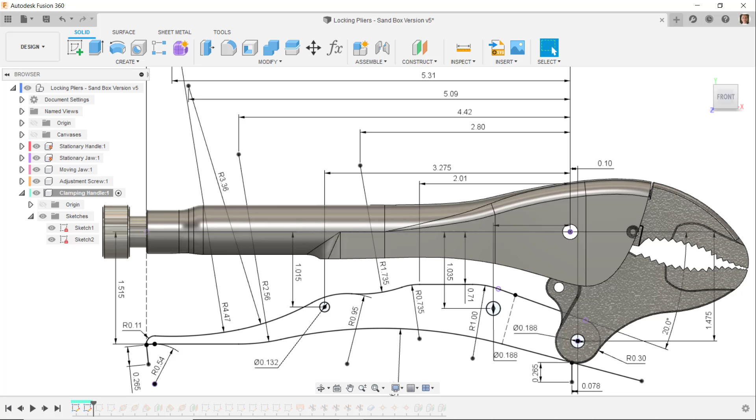I really intended for this line to go through the center of this cylindrical feature. So I'm going to go back to that canvas and edit it, trying to rotate that around just a little bit.

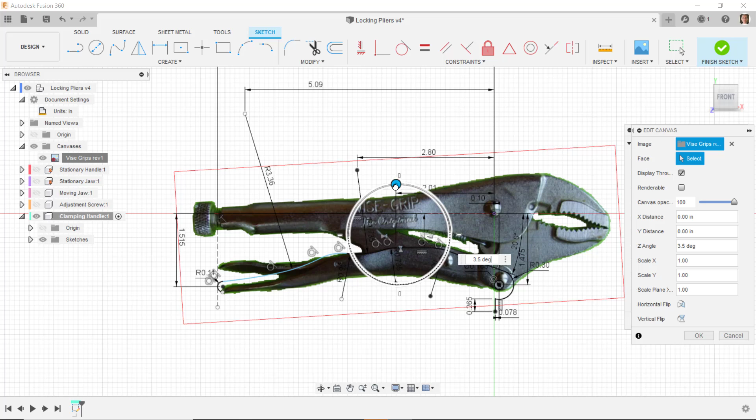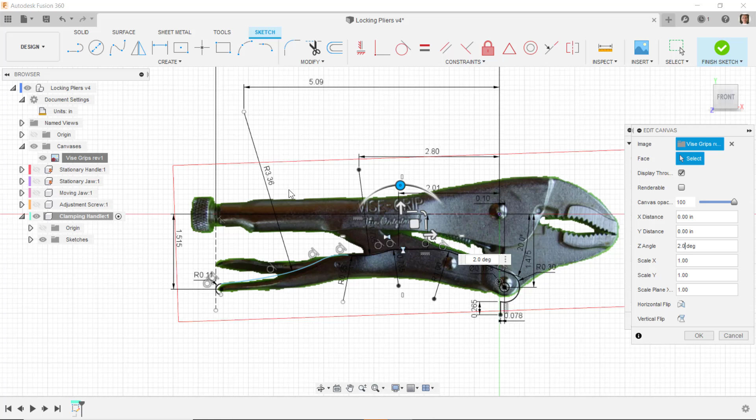I just need to go a couple of degrees, and it might be easiest to type in the angle if I have a hard time doing it by eye. Let's see how far... let's try 2 degrees. That looks pretty good right there.

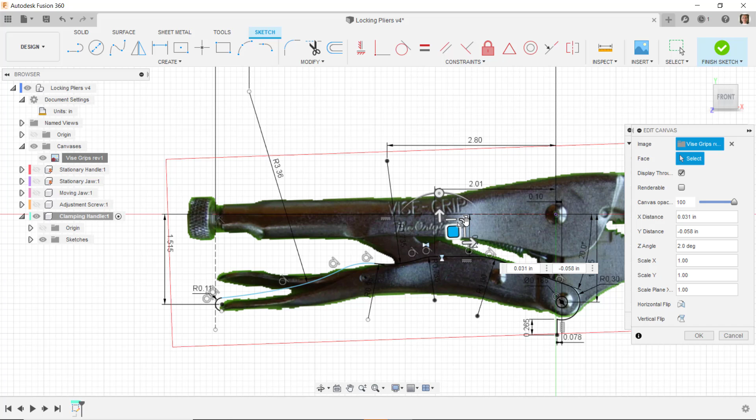Then I may need to move it down a little bit. I'm looking at the origin, trying to get in the center of this pin right here. I might need to scale it just a bit more too, and again, if I have trouble scaling it, I can put in a scale factor. Let's make that just a little bit bigger—I might have made that way too big.

So I need to go back down. Let's put it back on 1, and I'll do 1.01, a little bit bigger than that. I'm comparing it here and over here. So I'll do 1.02, go a little bit bigger than that, 3.

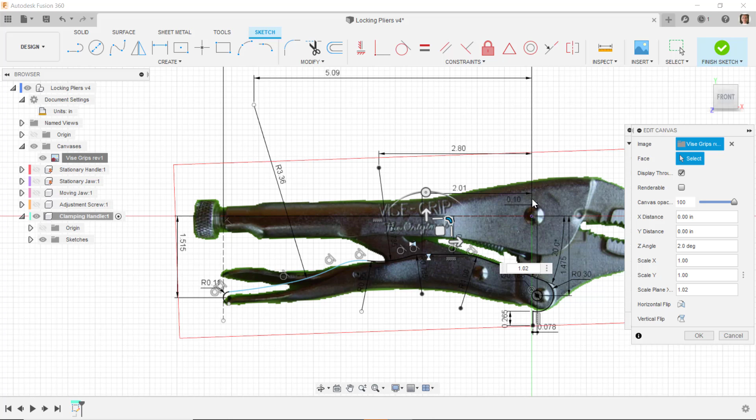Okay, that looks pretty good right there. I might have gone a little too far—let's go back to 1.02. So I'm getting my image to match. I can move this around then, and that looks lined up pretty good right there.

Then I will put in my dimension that goes in here. This is the dimension that is giving me a lot of trouble. I'll put it in right here, and I want that dimension to be 4.47, but that's quite a difference from the dimension I had in there.

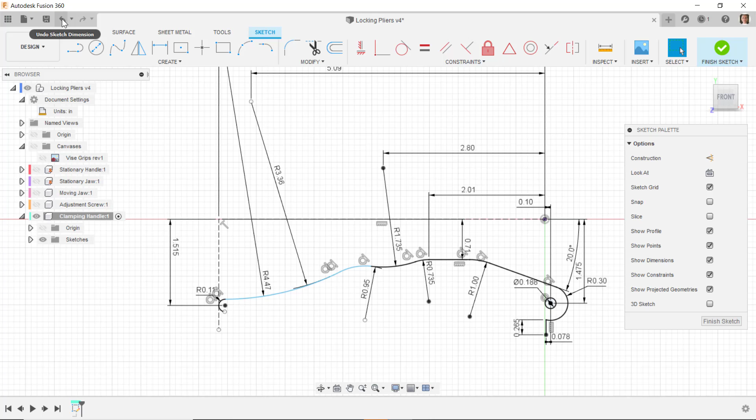So let's undo this and put in the location of that first. I'll dimension from here back to the origin, and that horizontal distance I'm going to do as 5.31. Then I will change the radius to 4.47.

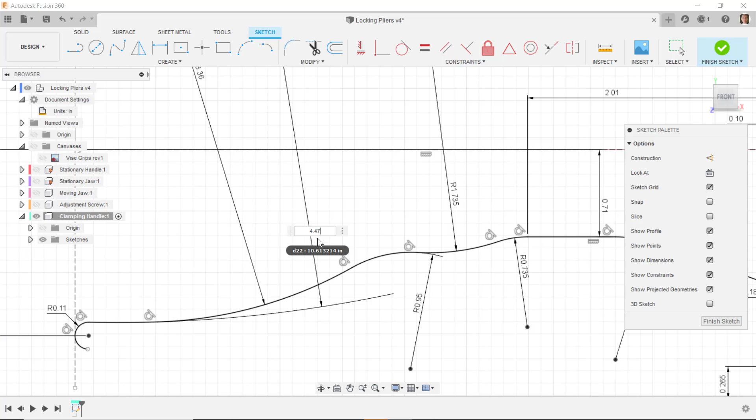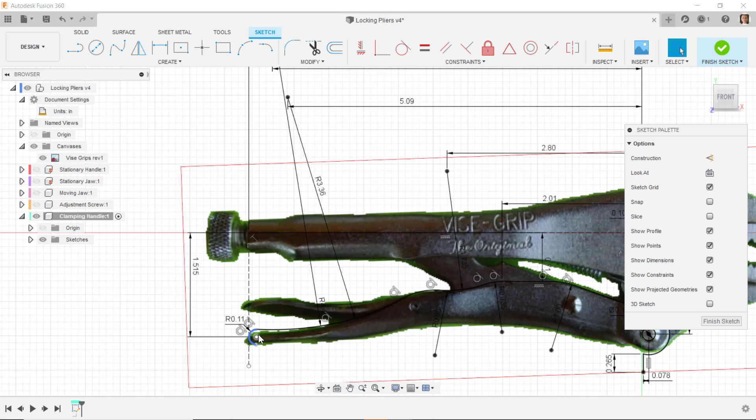Alright, so now everything has turned black—it is all fully defined, and I have the dimensions I want to make it more or less match up with the canvas image. Here I'm a little bit higher than what I show in the canvas image, but again, I don't have this center line. Maybe I rotated that angle too much as well—use the caliper dimensions as your guiding dimensions.

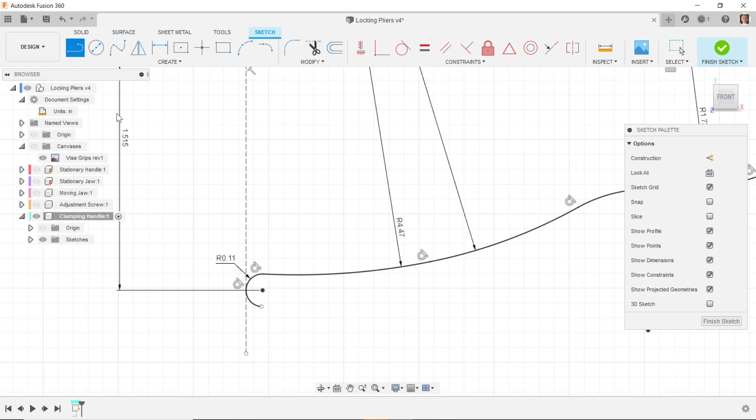The next few steps are a little bit tricky. I'm going to draw a line from this intersection between this arc and this line right here over to the center of that circle. And I can see that I didn't get this line horizontal, so I'll select that and select horizontal so that line is horizontal.

Then I'm going to draw a line in—actually I'm going to do this as a circle, or a tangent arc. I might have some trouble doing this tangent arc, but I'll try from this point, and I am having trouble, so I'll do it as a 3-point arc.

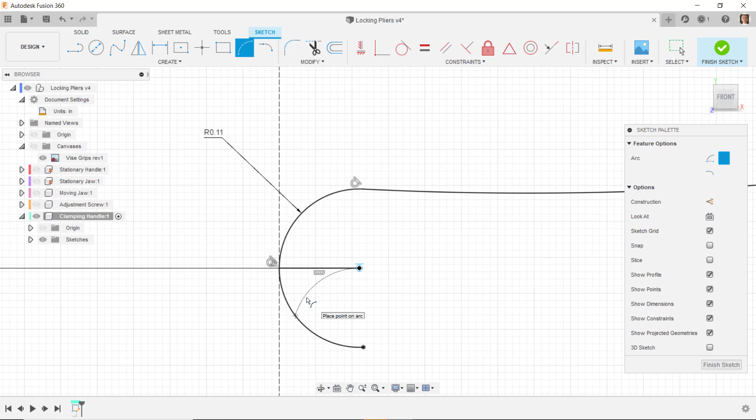I'll do it from here over onto this arc, and then I'll get it tangent to this line right here. I'm going to trim off the excess of this arc, and then I'm going to dimension the radius of this arc as 0.54, and let's bring that radius up here where we can see it better.

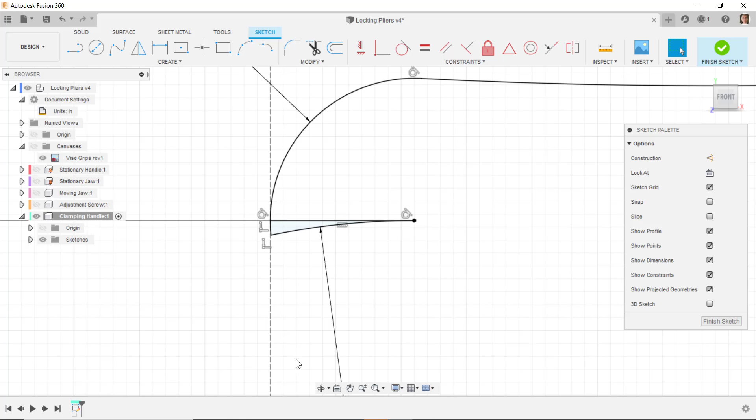Then I'm going to draw a line from this point coming at an angle down here. So I'll draw a line from here, and I'll come down like that—from the end of this arc, I came down.

I want to make this line tangent to this arc, so I'll set it tangent to this arc, and I want to dimension the length of that line—so I will dimension this line, using the aligned length of that.

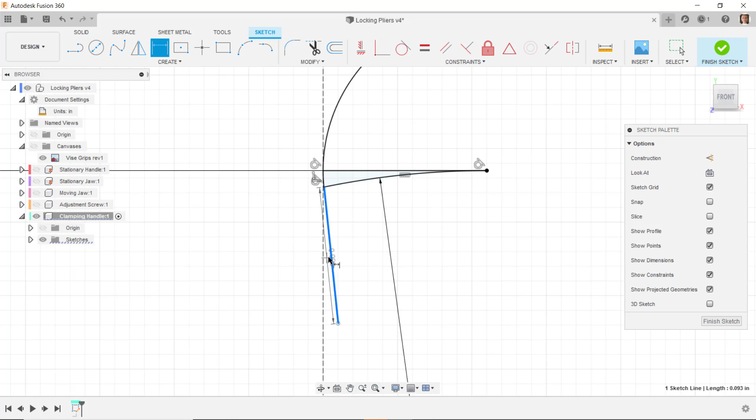I accidentally got the wrong line, so let's try that again. I want this line, and I want the aligned length, and I keep hitting the wrong thing, so let's zoom in on that. Okay, so I'm trying to get this aligned length, and I want that to be 0.265.

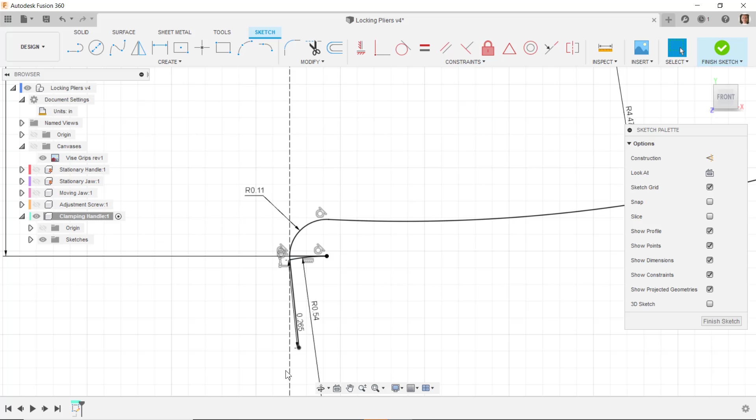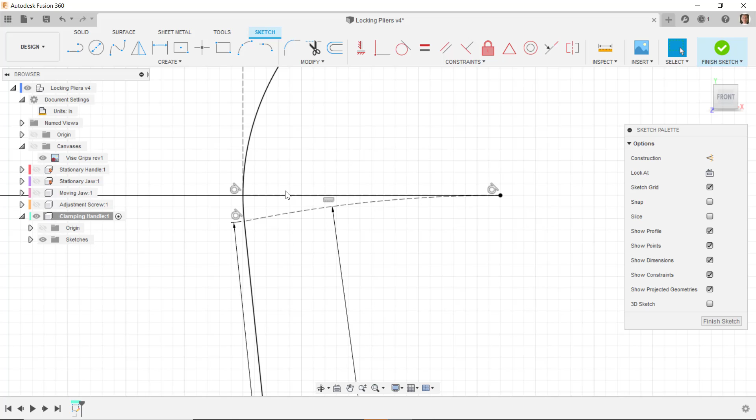I want to trim off the excess of this line, so I'll do trim on that, and then I'm going to change these two lines, and this is critically important. I've had more people miss this step than anything else: I want to change these two lines to construction lines. So it's now underneath of this dimension line. It's hard to see, but that line and this line should be construction lines.

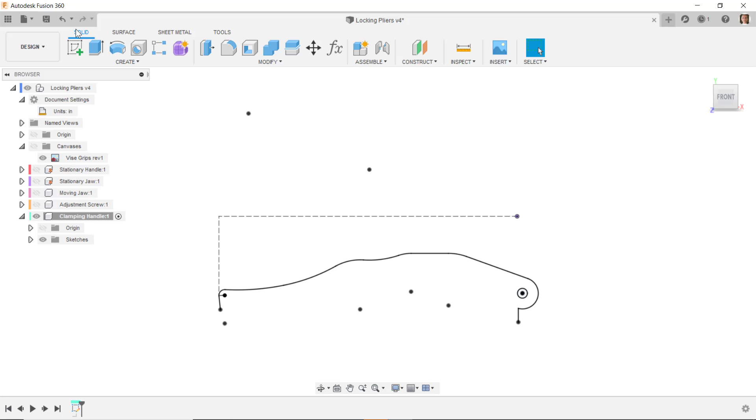So that completes our first sketch. I'll go ahead and finish sketch. And so here is our sketch, and everything has turned black. It is all fully defined. Let's go ahead and save this.

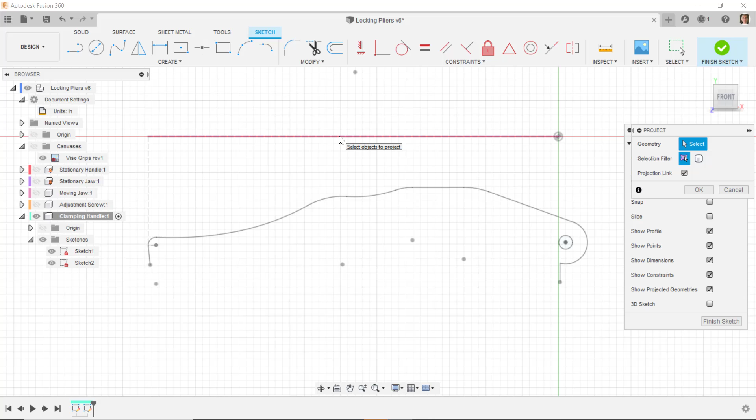So I'm going to start a new sketch, and again, make sure you're in the clamping handle component, and I'll start a new sketch on the XY plane, and then I'm going to project geometry. I'll press P on the keyboard for project geometry. I'll select this line, and I'm going to select this circle, and I'll say OK to that, and then I'll hide sketch number 1 so that we can continue on sketch 2.

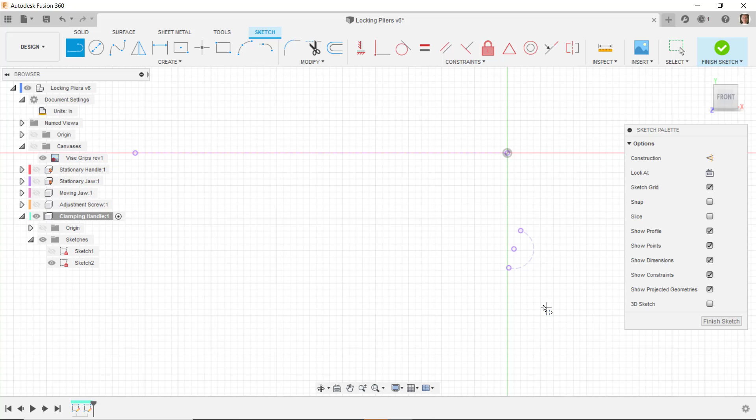I want to change this geometry to construction, so I'll select that geometry and change this line and this arc to construction geometry, and I'm going to then draw a line somewhere across here, about like that, and I'll click and drag an arc off the end of this line. I want to make this line tangent to this arc, so I'll do tangent between this line and this arc.

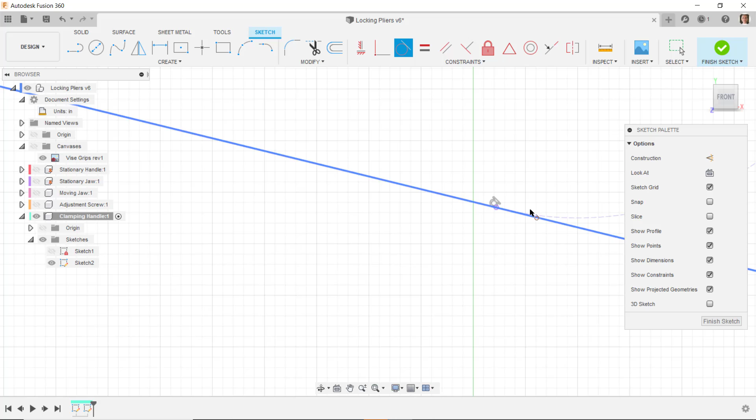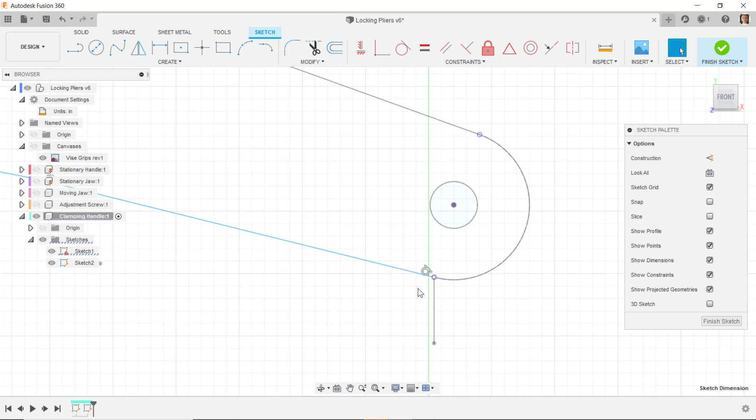And so actually the arc is trimmed off. The arc would continue on up across here. I might draw a circle here from here to here, make it construction, so that I can clearly see what's going on. Let's turn the visibility of sketch 1 back on for a second, and I want the end of this line to be at this point right here, so I'm going to drag that up so it's tangent to the construction arc that I projected, and it's coincident at that location.

I will then turn off sketch 1, and I'll put a dimension on here, and so this arc is 6.15.

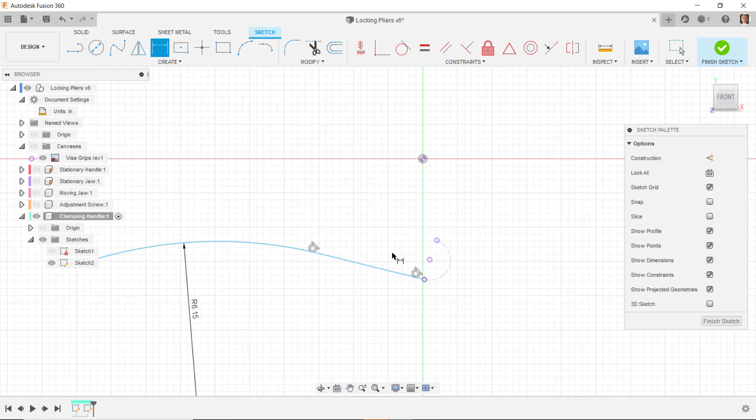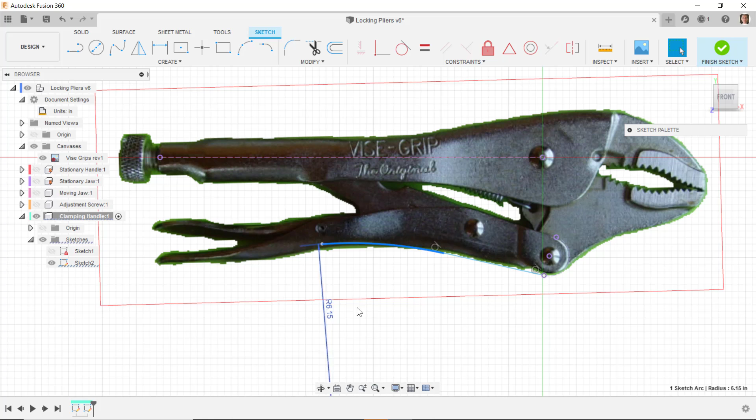And if I turn on the visibility of my canvas, so I have this line coming along here, so it'll go up to about here, and then this arc, I want that arc to be in this area right in here. I should have left well enough alone in here.

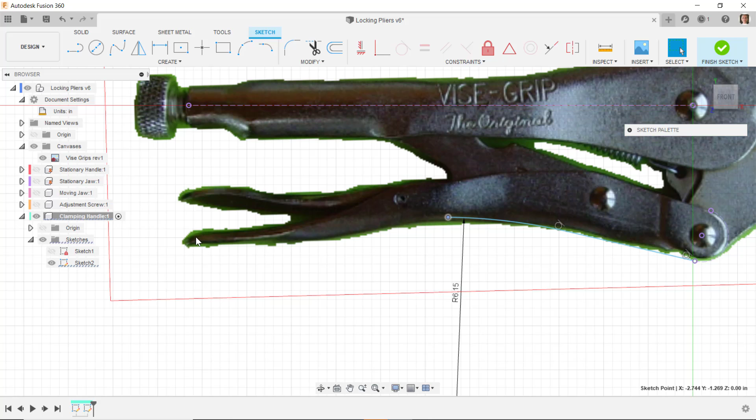And then we will continue down across here, and I want to get one other arc from that previous sketch. And again, this is a step that gives people trouble, so I'm going to turn sketch 1 on again, and I want to project this arc right here into sketch 2. So I'll do P for project, I'll select this arc, and then I'll hide sketch 1 again.

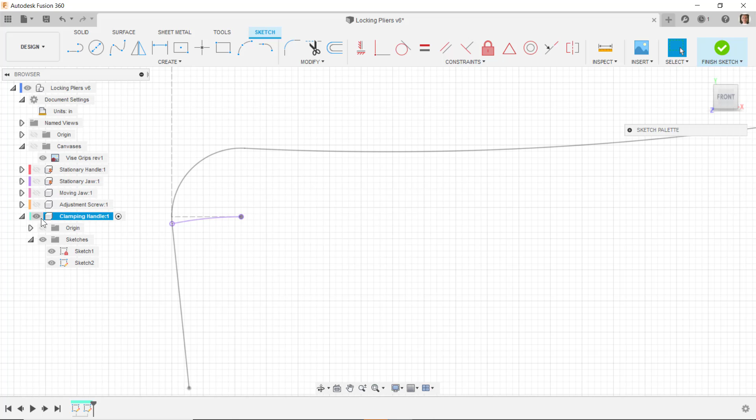This arc I'm going to leave as an object line. I'll then sketch a horizontal line from the end of this arc over to about like that, and then I'm going to click and drag an arc up about like that, and we'll put a dimension on here, and so the radius of this arc is 2.56.

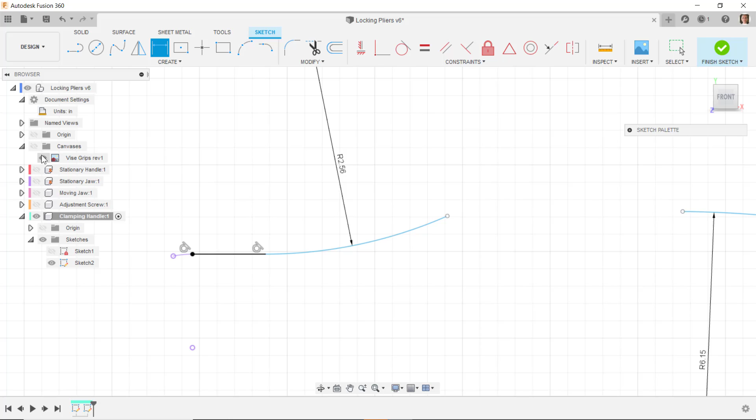And let's turn on the visibility of the canvas. So I'm doing the bottom side of this now. So let's drag this back in here somewhere. Then I want to put an arc going across here, and to connect all of that together.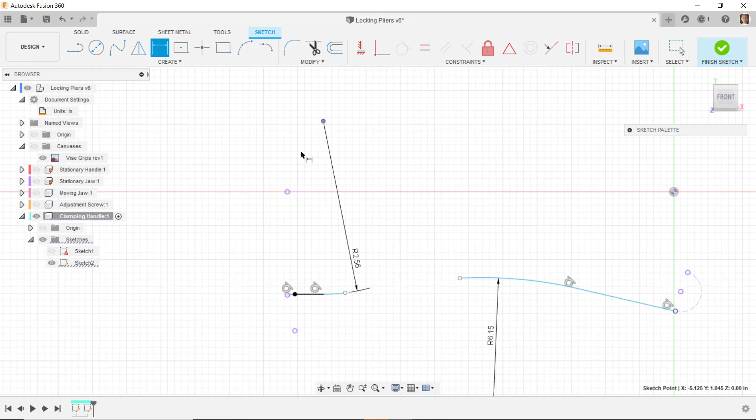Let's locate the distance of this arc back to the origin, the center of this arc back to the origin. Let's put that as a distance of 4.42, and then I'm going to draw an arc connecting these two together.

I'll do a tangent arc from here to here. I want to make this arc tangent to that arc, so I'll do tangent between this arc and this arc, and then I will dimension this arc.

After considering that, I decided I want this arc to come all the way back over to there. So I'm going to undo back to where I put that arc in, and instead bring this arc down and bring this arc up, and get those where they will be tangent to each other. Let's do coincident between this point and this point, and then I'll do tangent between here and here.

Okay, and then we need to put in another dimension to fully define this geometry. This geometry can still translate back and forth, so I need to put one more dimension on here. Let's dimension the distance from the origin to this intersection between the arc and the line.

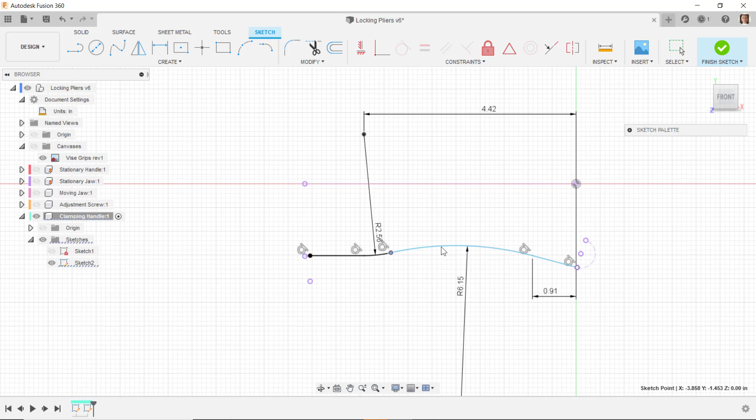Let's put that distance as 0.91. Now I was expecting it to be fully constrained after I put that dimension in, and so if I attempt to drag this geometry, it still isn't turning black.

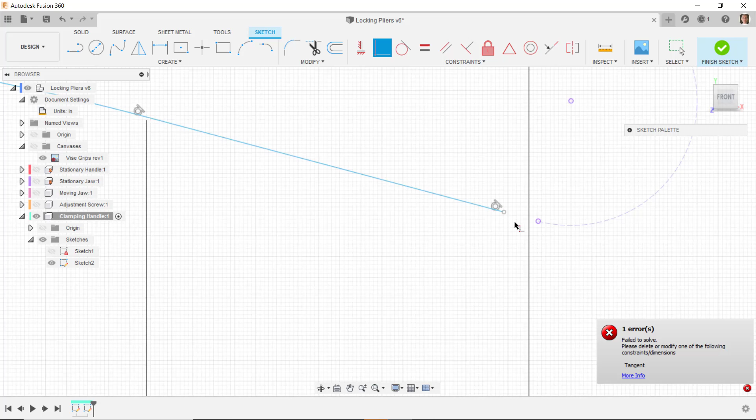I thought at some point I had this line coincident with that point, and somehow I missed that location, so I'll add that coincident in. I'll do coincident between this point and this point, and when I do, it gives me an error. So I didn't expect to have to put this dimension in, and that was actually the problem - I need to put this point coincident to that, and I missed that earlier. So I'll do coincident this point to this point, and it all turns black.

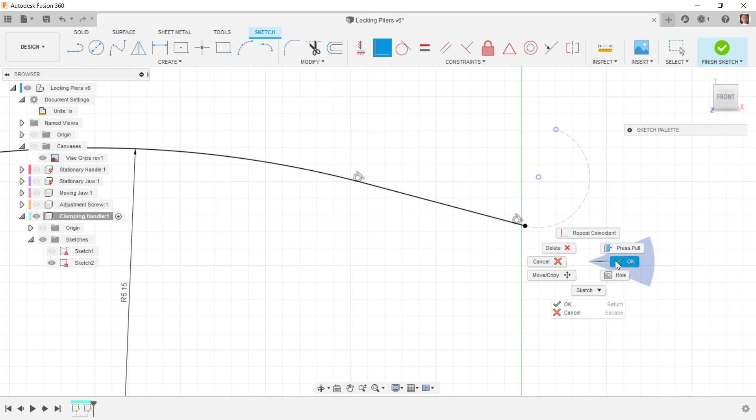It's fully defined. So start dragging geometry around to figure out where you have an error whenever you get an unexpected condition. So I have this curve in, and this is for the bottom of this handle.

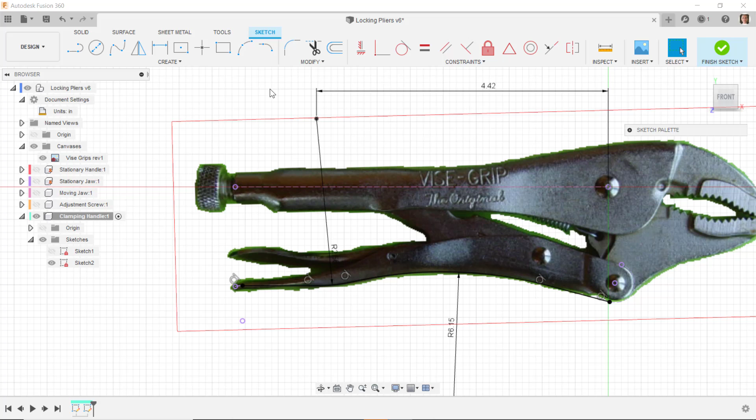Sketch 1 was for the top of the handle. Let's put the location here and here for this pin and the hole that goes through this part and the hole over here. So I'm going to draw a circle, and I'll draw that circle about right here, and I'll draw another circle about right here.

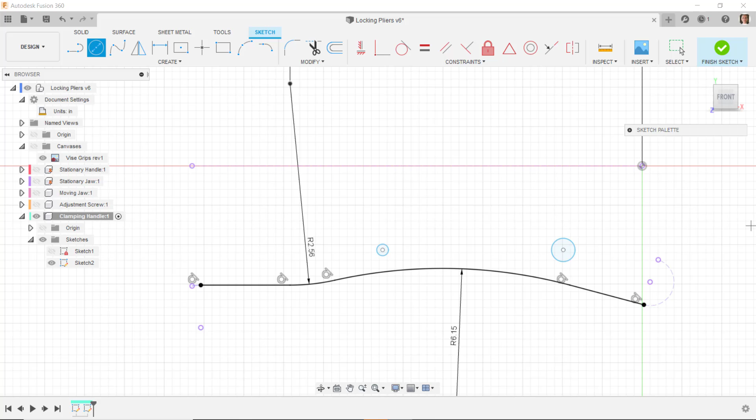And I'll put in the dimensions and the locations of those holes. So let's dimension this circle, and I'll do that as 0.1875, and I'll do the horizontal distance of this as 1.025, and I'll do the vertical distance

as 1.035. So measure with your calipers, get the best dimension that you can. I'll dimension this as 0.132, and I'll dimension the location from here over horizontally as

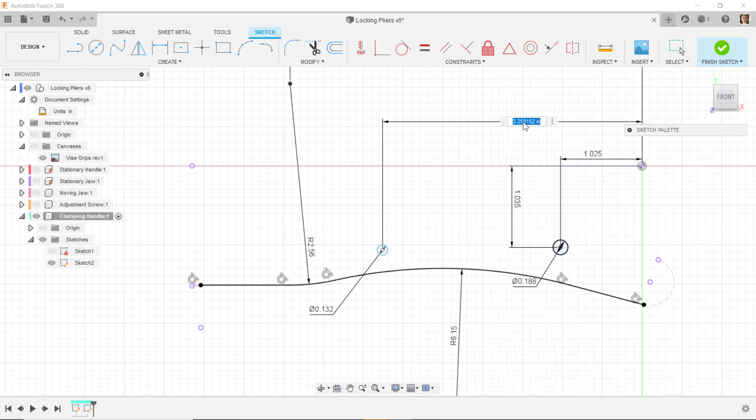3.275. I try to use dimensions that are easy to measure with calipers. I'll dimension from here up to here, and that distance is 1.015. So now this sketch is fully constrained.

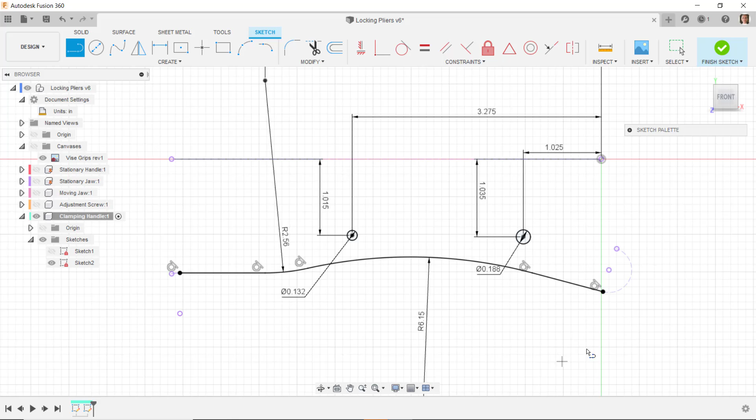I want to add one more piece of geometry to this sketch that we'll see why we use later on. So I'm going to draw a line from here, and I want it collinear with this line, and I'm going to make this one and this one equal.

So I'll do equal, and see that white dot will turn black. It's now fully defined once I make those two lines equal.

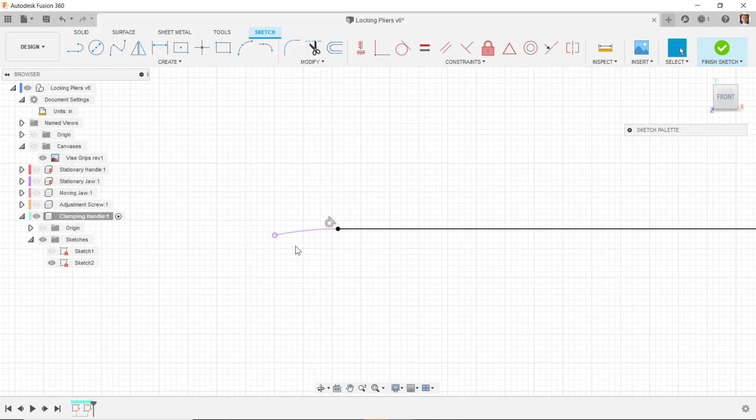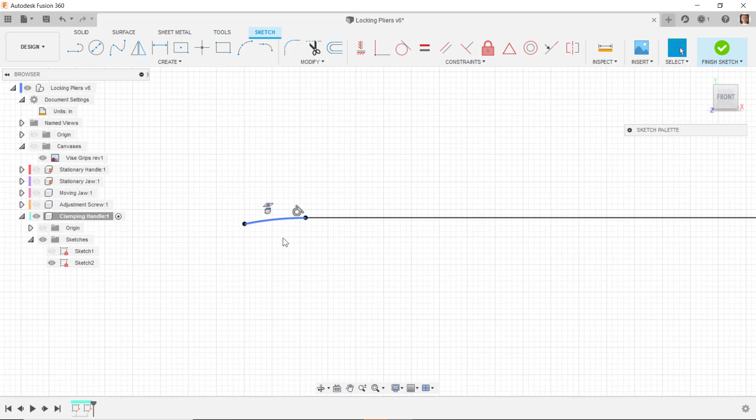Now I'm tempted to replace this construction line with an arc, so I think I'll do that. It's a projected line - I'm going to change that to a construction line, and then do a tangent arc or a 3-point arc. I'll try a tangent arc first, putting an object line arc over top of that. If I change the previous geometry, I'm less likely to have a lot of errors with the projected geometry when I make a change, if I put in that object line.

Alright, I'll finish that sketch, and that completes sketch number 2.